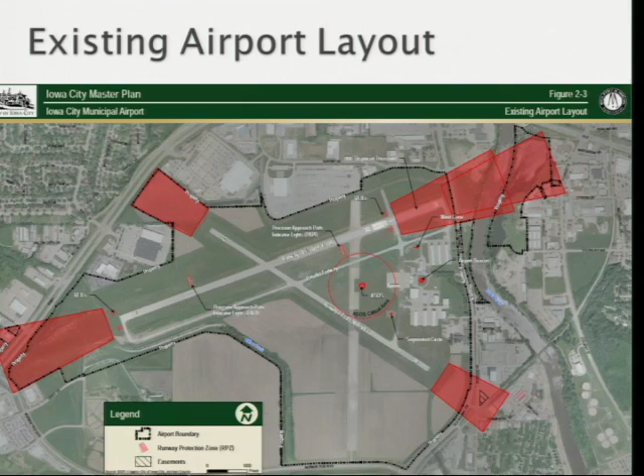So the master plan basically starts by looking at what we currently have. As we were going into the master plan, the common thought process was: this is the footprint we're going to have. We're not going to expand the airport to a great deal, we're not going to dramatically increase what we're doing. We've got a pretty good operation right now, but how can we further maximize what we have and make it even more efficient?

Again, planning considerations include the airspace around the airport and how we're protecting it, development within the airport confines, and ways to generate revenue. That's also evaluating options for the hangars, and the financial resources available to the airport - whether that's grant funding, local funding, or airport-generated revenue. All of that comes together to help develop the master plan.

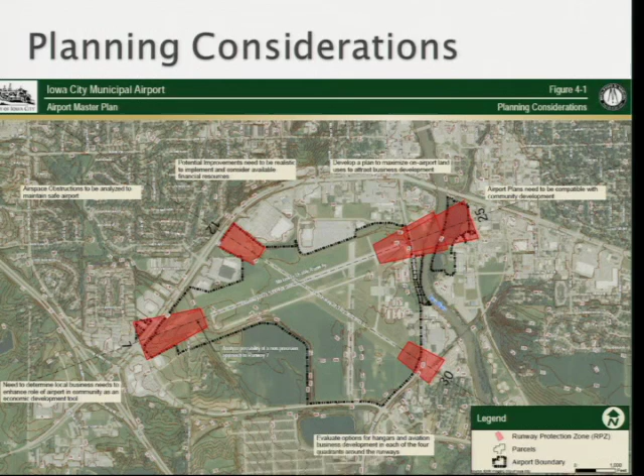One of the first things we looked at was the airport design itself, the category of standards it's designed under. The FAA really has two types of standards they're designing to: the critical aircraft, which is the aircraft family conducting at least 500 operations at the airport, and the approach types, whether you have instrument or visual approaches, and whether those instrument approaches are precision or non-precision. That gives us an airport reference code, and it'll get a little muddled. The reference code is adaptable to the runways, so each runway can have a design code as well.

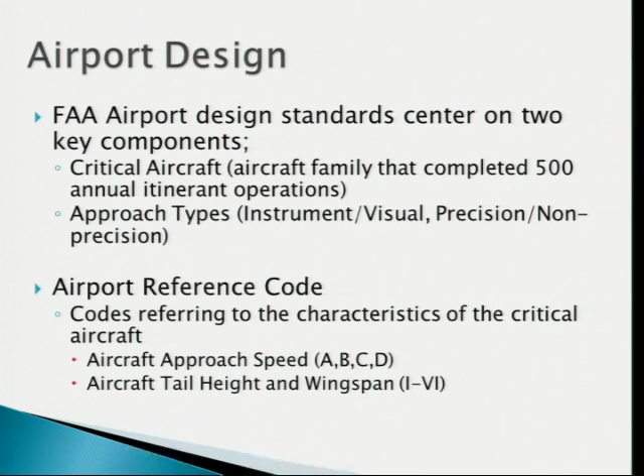So what's happening is we're rolling back the critical aircraft design back into the B2 category. That's the one where we meet that 500 aircraft operation threshold. And it's doing actually quite a bit of things for us, which we'll kind of start going into.

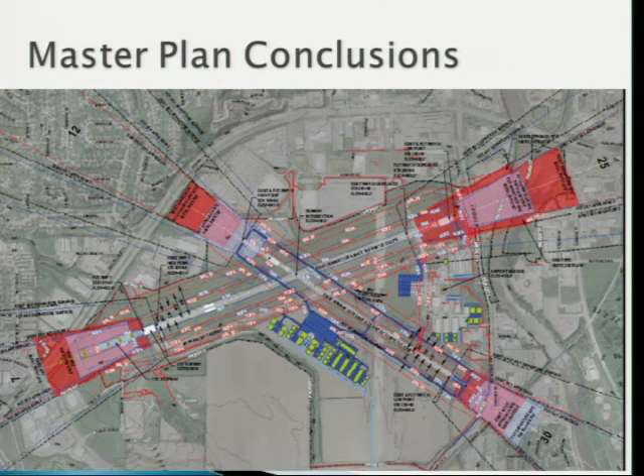This is an overall view of all the changes we expect over the next 20 years, and maybe even longer in terms of hangar facility construction. First and foremost, it's going to have a critical aircraft design change - we're rolling back from the C2 to the B2. What that does is reflect the aircraft that are actually using the airport to that 500 operation level. It doesn't prevent larger aircraft from using the airport. Really what it's doing is changing the protection zones and the areas that the airport and the FAA deem critical to the operations.

By instituting that change, we're actually expanding the landing distance available on runway 7. We're going from about 4,300 feet to a little over 5,000, and there's a couple other changes planned in the future that can bring that up to 5,200 feet.

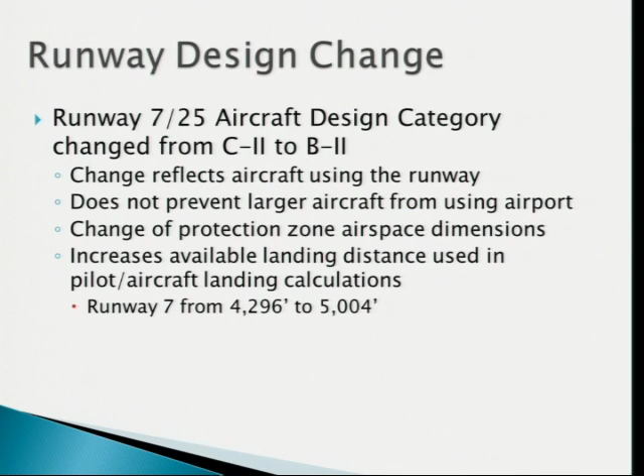So it gives you a look - the red is the current runway protection zones, the pink is what they come back to with the runway change. So again, less land we have that needs the critical protections opens up a few areas that we currently own that may be considered in the future excess land that we can put back into the tax rolls, that sort of thing. And it still maintains safe operations for the airport.

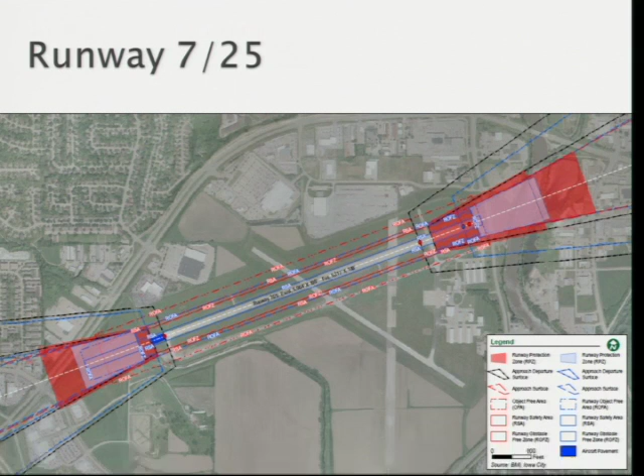Other things along the way for 7-25: again, that extension of 213 feet, we can get a total landing distance of 5,217. That's critical for the operators. There's a lot of insurance companies that have a 5,000 foot magic number for operations when you get into charter aircraft. So it's really key and critical for the airport to be able to meet that.

There's some future options that will need further study as we get to that point. There's what's called a stopway at the end of pavement. You can put that down and it's able to extend some of the declared distances for runways, which the aircraft operators use. Some airplanes can then take on more fuel or more passengers and be able to operate out of the airport.

Potential lighting additions - again, something else that will have to be considered as more of a cost benefit - but additional runway approach lighting could make operations in inclement weather easier to handle.

Runway 12-30, the secondary runway, doing a couple of things on that one. That will get a displaced threshold on the northwest end and a little bit of additional pavement on the southeast end. What the displaced threshold does is move that approach protection zone further into the airport grounds, and it's going to eliminate a lot of obstructions being found on the northwest side of the airport and the city. The southeast side really doesn't change anything, but it enables us to maintain relatively close to the existing landing distance that we have.

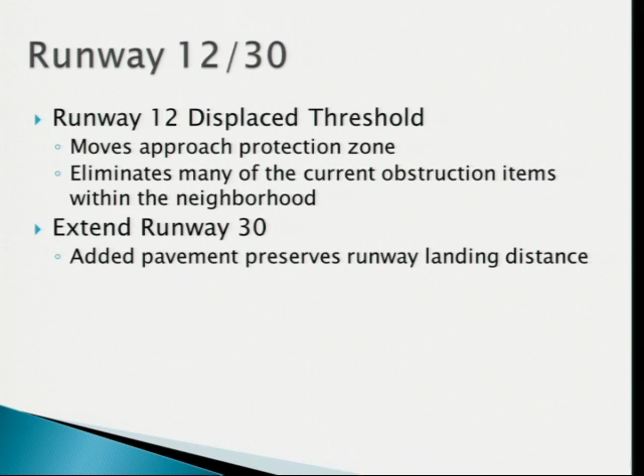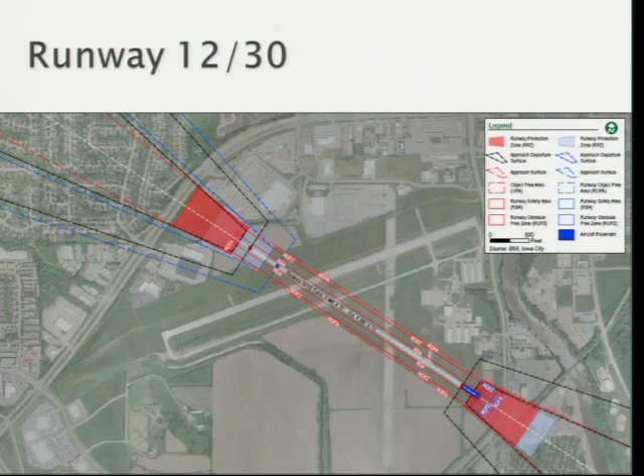And there's a visual of it right there - it's a roughly 500-foot displaced threshold. Again, bringing the approach path out of the neighborhood a little bit better, so we have less obstructions to deal with there.

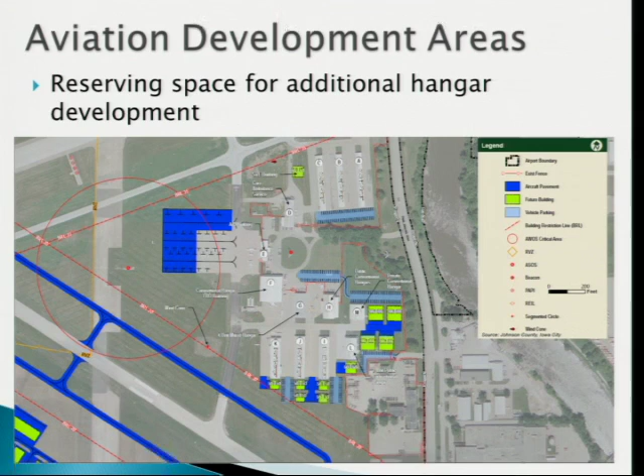On the west side of the airport, we have space to basically double the size of the airport in terms of the buildings, so that becomes the critical aviation reservation area in terms of future expansion, future need.

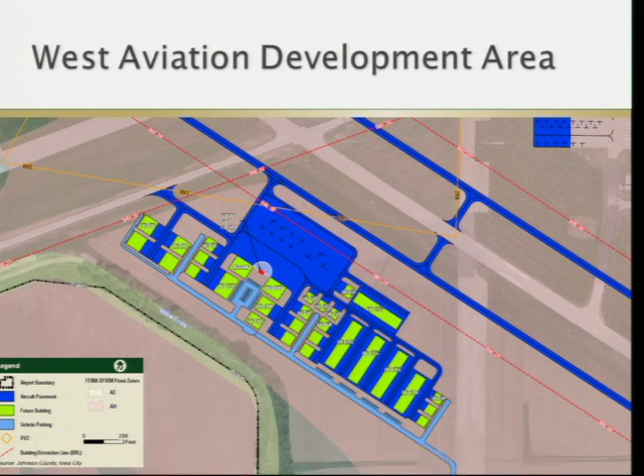And then lastly, we have some room for non-aeronautical development. This could be really any commercial use or any use that doesn't meet necessarily the airport's direct operating objectives. This is ground along Mormon Trek.

The key with this area is that leasing preserves revenue for the airport operations. Any of the non-aeronautical uses would still need to be essentially blessed by the FAA, and the consideration is that development of that area would likely end our current farming operations. So we have to be careful of timing, otherwise we have a significant loss of revenue until that comes back from the development side.

But here's a picture of it. It's roughly about 45 acres that could be potentially available based on the master plan study.

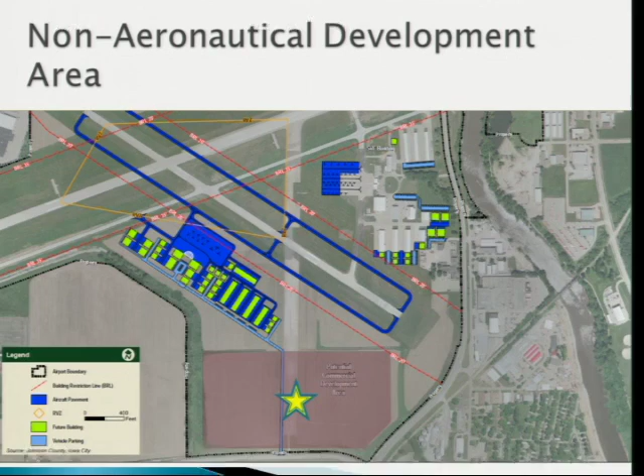One of the things coming up that the FAA has been pushing for a number of years is obstruction mitigation, making sure we have clean approaches. As part of the master plan, we do conduct a survey of the approaches, and we do have some items floating out there that we'll be working in the future to essentially mitigate.

It could be anything from trees, power poles, or other objects. Fixed items are a little easier to deal with because we can light them, and the FAA can say okay, you've got a warning light there. If they're natural obstructions, then it's more of can we trim them or cut them back or replace them with something similar that doesn't quite meet that height restriction area.

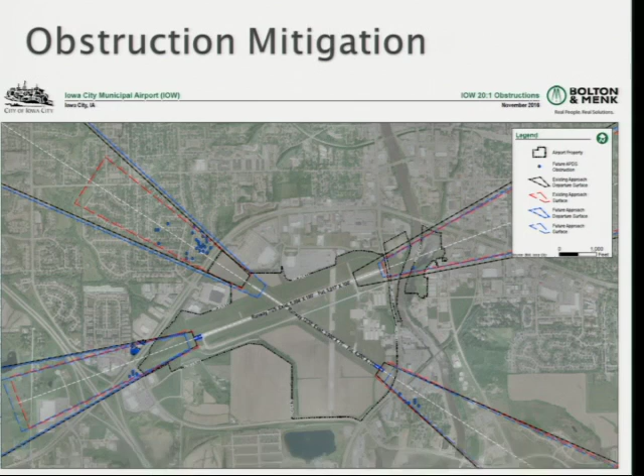So with all of this, obviously there's capital funding costs. Anything the FAA participates in, they participate at a 90-10 split, so that's one of the nice things. As part of the airport improvement program, we do get an annual entitlement of $150,000 a year. That money becomes the first in anytime the FAA is working on a project at the airport.

And then the FAA has their own ranking criteria where safety will trump expansion in terms of the projects that they fund.